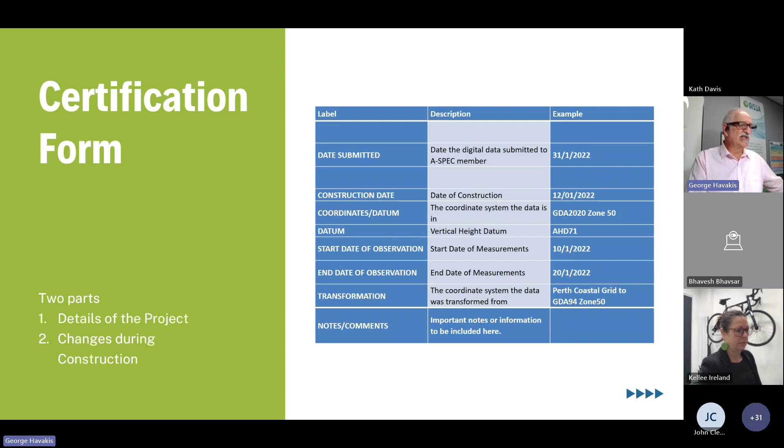The certification form, which we are requesting, is provided with every submission. You'll see things on here like datum, coordinate system, construction date, etc. Very valuable information, and complementary to the area work extent boundary. But if there is no area work extent boundary, this is really vital information as well.

So what we've now done is combine the two elements, the certification form and the quality report, and provided it into a CSV. The intention is to cut down the number of documents to be provided, and this provides the information required at a project level.

It's a joint responsibility, and it's really important that both the asset owner and the service provider to that council or water authority are jointly responsible for ensuring that the data required about that asset is actually provided, and that the asset owner gains confidence that everything has been dealt with.

We've provided this into a spreadsheet, a CSV, and it's available from the A-SPEC website. You don't need a login, anyone is welcome to download it. Just go onto the A-SPEC website, in the search box type in certification form, and you'll get an option to download the document. It's in a zip file.

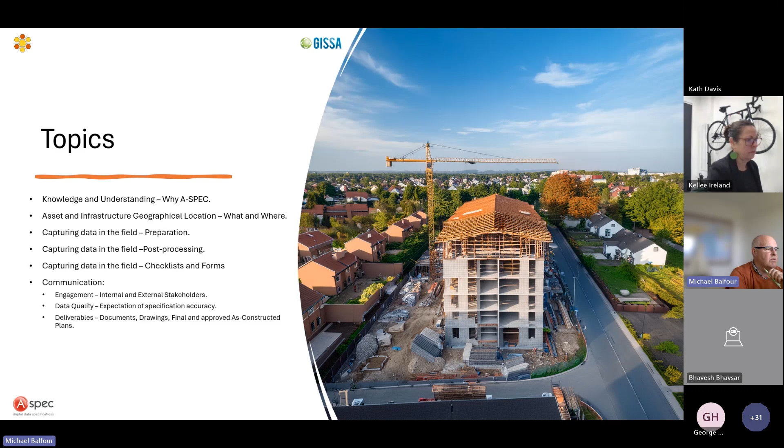So knowledge and understanding, what we need to know. What classes are we working with? Knowing which A-SPEC classes your project is constructing and what's expected as the final deliverable to the client. Why A-SPEC compliance improves efficiency, accuracy and repeatability. Understanding of the authority's need for developing preventative maintenance and asset renewal replacement programs.

Why do we need to do this? Some of the benefits provided from accurate asset data downstream are a better understanding of budgeting for future developments and previously mentioned asset maintenance programs. In this way, knowledge and understanding helps to improve the flow of asset infrastructure related information across businesses and authorities, with the financial reporting of infrastructure asset related information across businesses and government.

Assets, infrastructure and locations. Firstly, where are the assets? Having all your spatial data accurately represented has massive benefits for organisations. Additionally, knowing where electrical components, heating and plumbing assets are located brings great value as well. Secondly, what is the quantity of assets to be installed and captured? Documenting the count and the linear measurement of assets within A-SPEC asset classes to be installed and constructed and then

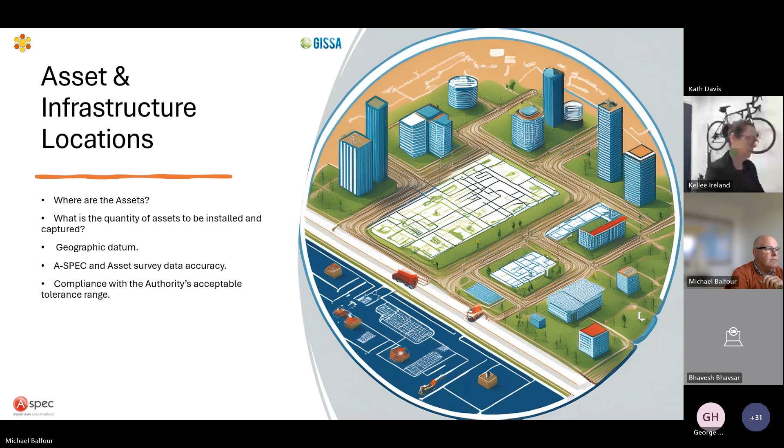Okay, here's an example of a live project we're working on.

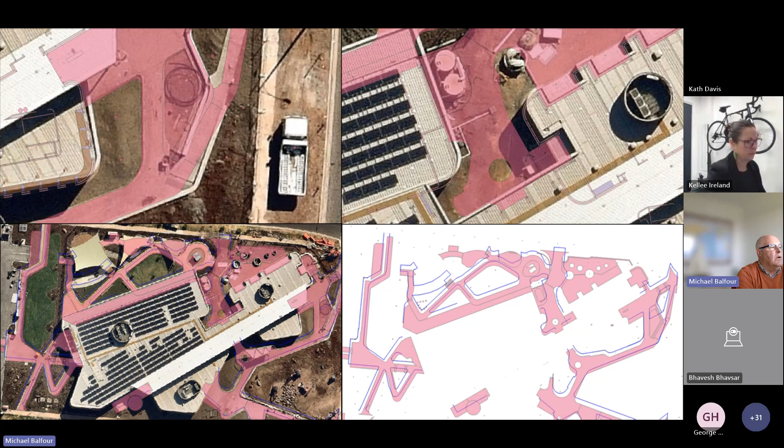So we'll look now at field data capture preparation. Clearly, just in the last example there, we saw the plan versus some as-constructed lines. And when you compare that to the imagery underneath, it's clear that these things don't match up. So it's really important that you amend your drawing, have a final as-constructed drawing, constantly amending that and liaising with your stakeholders about those.

Again, when we come back to the last image, when we look at undertaking a final site survey, this is critical to know that what you're delivering is accurate, which is pretty helpful. Reviewing all the information with your team, your engineers, and construction or technical officers has a great advantage. And another issue is knowing the geographic datum requirements for your client—it's not just a site setup, you need to survey in a particular projection.

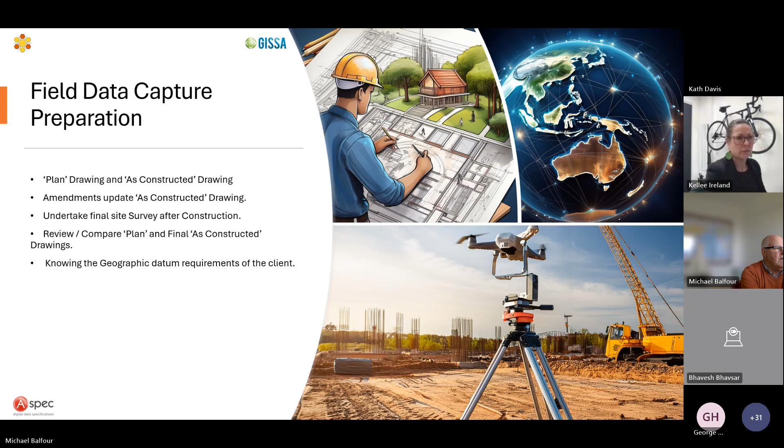A-SPEC attribute data—has there been changes in materials, diameters, widths and depths? There can be a financial impact on project cost if these items are recorded incorrectly.

An example of this is, for me, that when we began implementing GIS and AMOS within a business, we received construction data. We received the plan data that we could consume into the GIS. However, the supporting documentation for capitalisation would tell a different story. So I'd have a count, say for example, of 100 metres of pipe in the GIS, where the capitalisation form would have 150 metres. So where's that extra 50 metres of pipe that's been costed for?

The count of things like fire hydrants and valves can be somewhat off as well. So when you compare what's been delivered to what financially has been delivered, that needs to be addressed, and these types of documents assist with that.

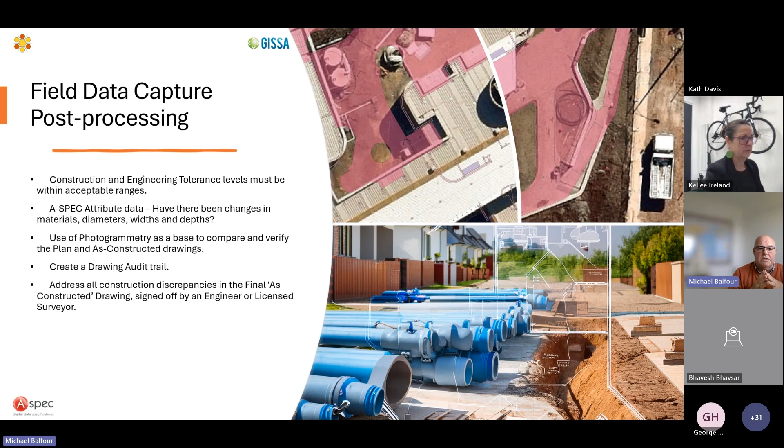Then we'll just move on. The next one is, as George spoke earlier on, it's about checklists and forms. So the A-SPEC asset and data handover checklist has been created to assist in identifying and confirming which asset classes should be collected for the project.

The project QA report documents a quantity, acceptable tolerances and changes of assets in each specification to be collected, and can also assist in evaluating a completed project in conjunction with the asset and asset data handover checklists. These documents, as well as the asset attribute A-SPEC attribute data, can assist the authority in the capitalisation process of the projects for their financial asset registers.

These checklists can be utilised with both paper and digital forms. Users may also find it beneficial to integrate these checklists into their data management plans and best practices for field data collection. I've experienced implementing GIS and asset systems and developing the flow of asset data throughout the business. The accuracy of the data, and the accuracy and number and length of assets, can significantly impact the financial asset register for future budgeting and project forecasting.

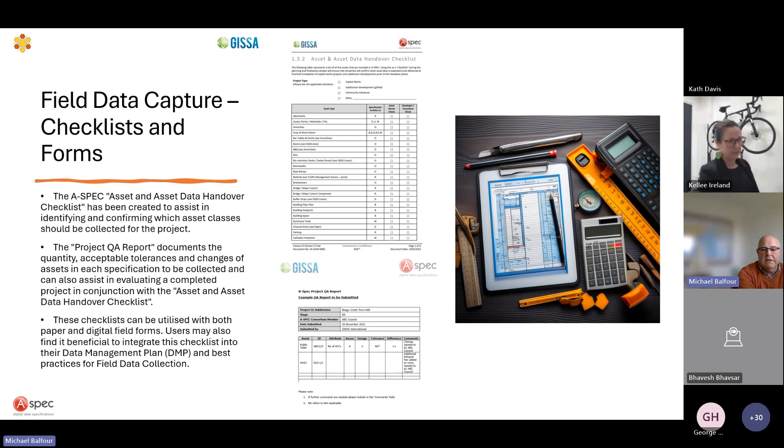And these checklists assist with that, particularly the quality assurance. I can't stress enough how important that is to understand at the completion of a project, is to have that information for your financial team.

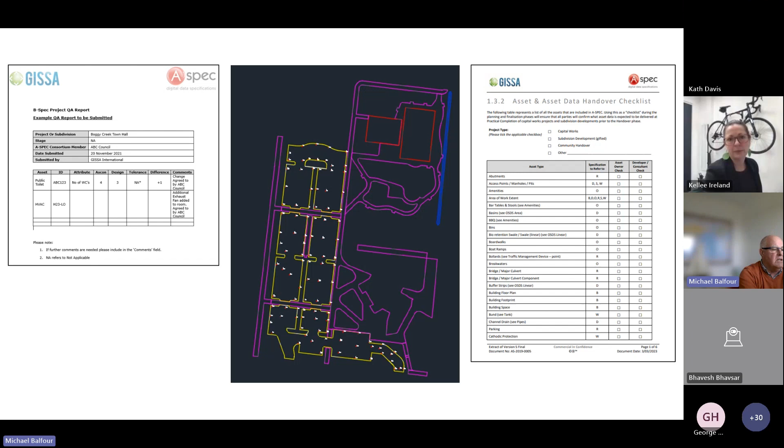Okay, another example here is what we typically deal with. We receive what's on the left and capture what you see on the right using the B-SPEC structure.

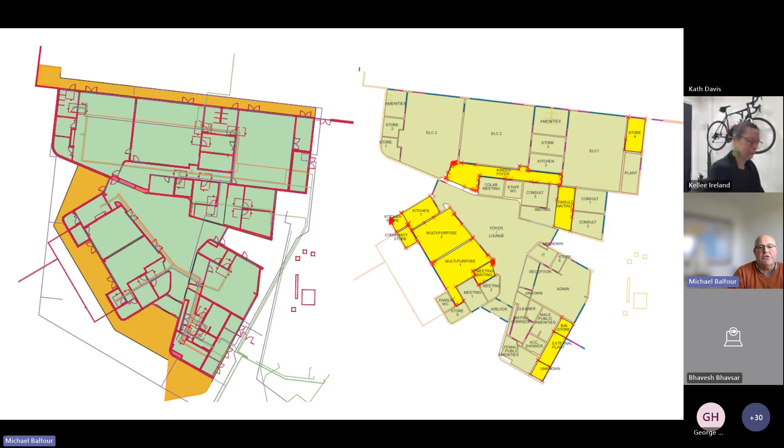And what we see here in yellow is what we've identified as missing A-SPEC, B-SPEC attribution for this asset class. So knowing what you've got to capture, how you're going to capture it, and what data you need to apply to it is pretty critical. So that stops all the toing and froing with the clients.

All right, we're going to talk about communication. Engage the stakeholders early, determine who will be responsible for specific tasks, establish and hold working groups, and ensure that the meetings are well documented. That's really important, documenting your meetings and who has to do what. Keep the project at the forefront during meetings.

Working groups are excellent for reviewing the processes, as I mentioned earlier on. Talk to surveyors and developer consultants and speak to the asset team at the authority. Temper expectations and understand what the needs of the clients are. Don't be a silo. It's not difficult to reach out and talk to someone. It's better to do that than create an error.

Data quality: understanding data quality is just as important as the work itself. By avoiding data re-entry, identifying missing elements in plans and spreadsheets, and updating as-constructed drawings, you can eliminate the need to follow up on late or incomplete submissions. Provide geographical asset data accuracy for as-constructed drawings, and understand why A-SPEC is being used, and provide A-SPEC asset class attribution with accuracy.

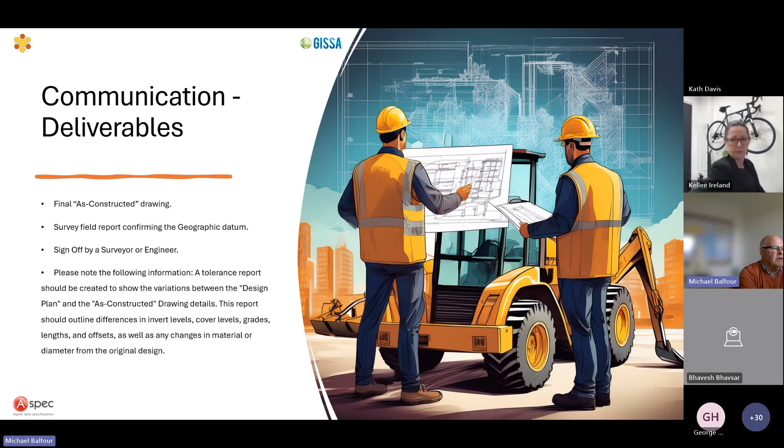And please note, a tolerance report should be created to show the variations between the design plan and the as-constructed drawing details. This report should outline differences in invert level, cover levels, grades, lengths and offsets, as well as any changes in material or diameter from the original design.

So, outcomes. What we've learned is we're going to deliver accurate data on time, all the time, with correct procedures and policies in place, and the right people knowing what they've got to do and when they have to do it.

Communication between all stakeholders, no silos, no one left in the dark. You empower the council with data they can trust. They know that they come to you and that you're going to supply quality data that's certified and hits the mark for their financial registers.

And improved governance. Some of these things we spoke about earlier, who's doing what, when they're doing it, and who has to deliver it, should be built in. It's my experience that we've built this into the construction contracts, so your developer consultants can adjust their financials or rates to cover the extra work needed for these things, and the business is confident they're going to get accurate and complete data. Most importantly, for the private sector, it guarantees a quicker return for your bonds and deposits.

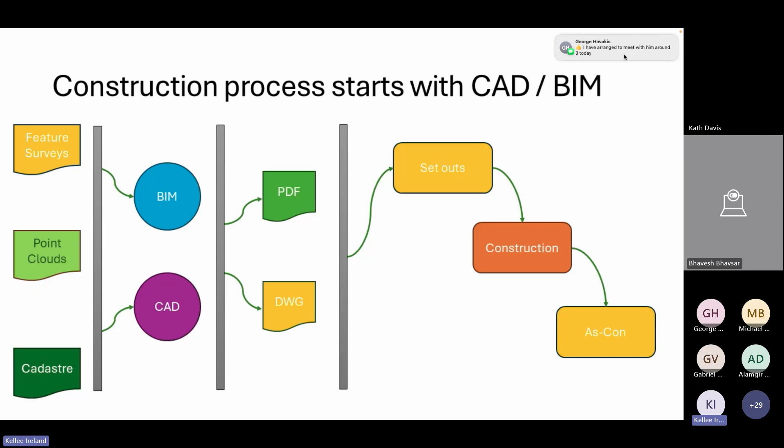From there, the setouts occur, the construction happens, and we develop the as-constructed drawings. I found that a better process, and a process that I think is more practical, is...

...to take the feature surveys, point clouds, cadasters, and to build a reference drawing, including topographic surface models, topo solids and aerial photos, and keep that reference model as a source of truth for the start point of the project.

Then take that into the BIM or the CAD, do the designs, update the reference from the design, so it becomes a massive big drawing, but it is possible to work with that. And then from the reference drawing, we extract working DWGs and PDFs, different views, different zoom-ins, and use those for the setouts and the construction.

If we did that, it's easier to keep all the different applications together and get the different data sets to merge. As for the attributes, we make sure our reference drawings are full of schedules and other data elements, but we also create exports of the attributes separately, and it's easier to get the attributes extracted from the models and map them across to the actual geometries.

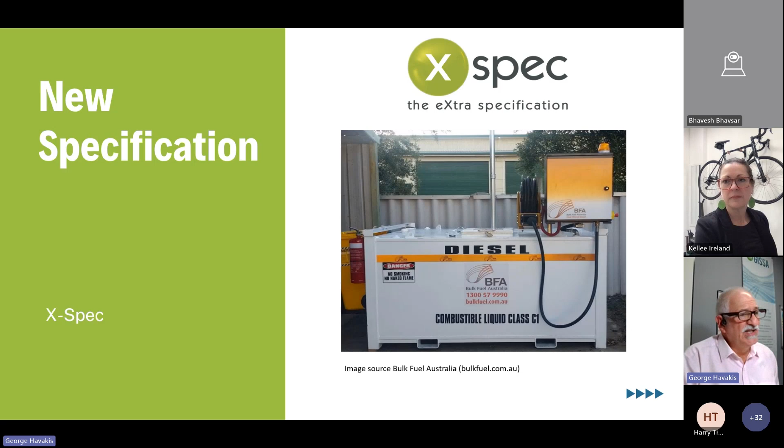So essentially fuel tanks or anything that might be around that. There's quite a bit of work that's gone into the fuel tanks, and the research that's been done. So that will come out towards the tail end of this year, post all of the forums and the showcase.

We're also looking at EV charging stations. So whilst this came up as a particular issue for A-SPEC, it's likely that the EV charging stations will be linked to the parking feature within A-SPEC.

Finally, from an X-SPEC perspective, this is what you can expect: solar farms. These will be a longer time frame as we're looking to determine the most appropriate spec to fit in, and it may even be that we're under a future E-SPEC for energy.

X-SPEC, when it comes out, will be available, and it'll be a complementary specification, that is, no additional cost to subscribers. We're looking at this to fit asset classes that don't naturally fit into existing specifications. If we create something like an E-SPEC for energy or a G-SPEC for gas or similar, then that will be a full specification in itself.

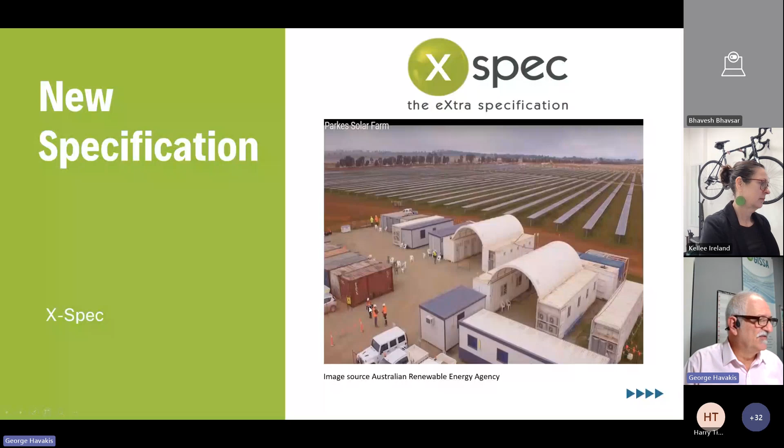So we've talked about a change, so we have a new initiative. You've experienced a community speaker through Michael Balfour. Next week, our community presentation will be from Mike Freeman from Mitchell Shire Council, who will be talking from a strategic asset management perspective. But you'll see on my slide that I've got key facilitator Sarah Neski.

Now, what does that mean? Well, actually, this is the last time you'll be seeing me in these forums, because on Sunday I head off on leave.

And so one of the initiatives that I'm very happy to say Kellee came up with is, well, actually I think her words were, 'We don't need you anyway, George, so let's just invite someone else to do what you would do.' Yeah, thanks for that smile, Kellee.

So Sarah Neski has agreed to be our first guest facilitator. So we have guest facilitators and community presentations for all of our forums starting from next week with B-Spec. So we're really excited about that and looking forward to it.

Thank you, George. Kellee? Django's got his hand up for a question. Yes, Django. No, I didn't have my hand up. Oh, damn it, it was supposed to be a surprise thing. But yes, it's sad, or applause. Sad not to see you, George, coming up. But it is good to have guest speakers, and look forward to it this year. It's exciting. Yeah, thank you.